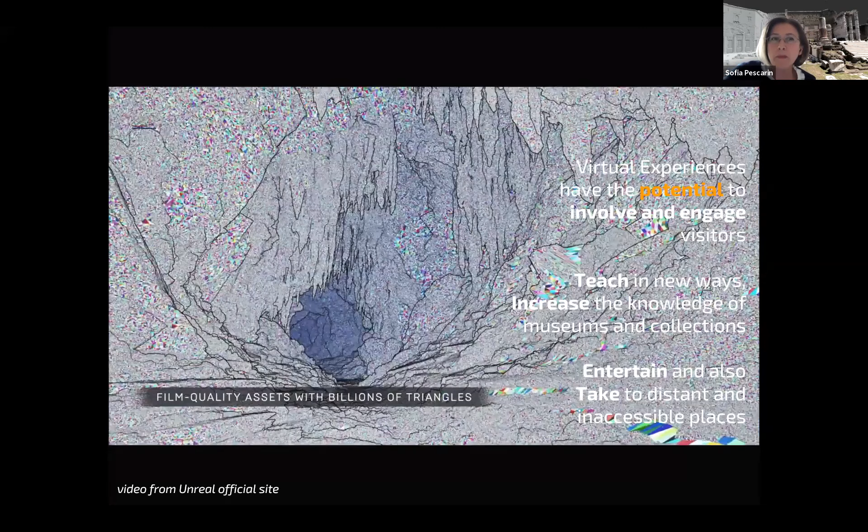But on the other side, we are here because we feel, we know, we understand the potential of the VR immersive environment. What you are seeing here is just a video from the official site of the new amazing engine, the 5th version, which is supporting full capability for a really high number of polygons in the near future, enabling us, in digital acquisition, to really keep the quality of our data.

We understand also the potential of VR in teaching and improving knowledge. There has been a lot of work in VR and learning, and also trying to increase understanding of museums and collections, a lot of work about virtual museums. And also with VR, potentially we can take visitors to distant and inaccessible places.

And this is what potentially could have happened also in this COVID period. So immersivity and interactivity are defined as the key elements, those that can create the sense of presence. But these technical aspects are not enough actually to fulfill visitor expectations.

So I wanted to start from real visitor expectations, when they decide to go to a place to start a journey in cultural tourism. And actually what we are seeing online is not a lot; it's not so close to our expectations. I'm talking about virtual visits. You can find 360-degree visits, in some cases with some audio, but also in the more interesting examples of computer graphics exploration online. Sometimes I feel that there's something missing.

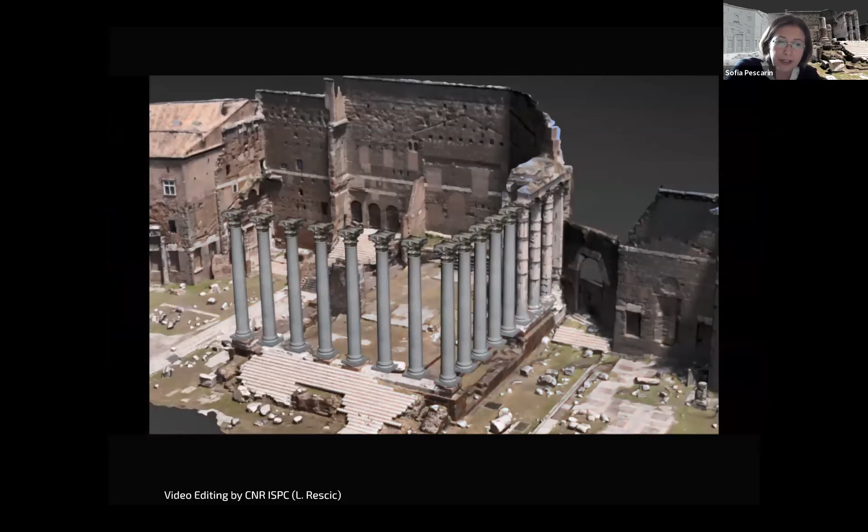We tried to adopt a co-design approach and work together. To develop the game, we started a reality-based acquisition campaign that led us to reconstruct, first of all, the 3D scenario of the site as it is today, and used it in combination with all available sources—historical, archaeological, iconographic—including the latest archaeological discoveries in this very central archaeological site in Rome.

From that, we reconstructed a new 3D scenario of this site as it potentially was in the 1st century, in the time of Emperor Augustus.

We then identified, together with museum experts, 35 learning concepts. Those learning concepts were also the information given to tourists visiting the site by the guides. Let me give an example: the Forum of Augustus was a space for justice, for trials. Trials took place in tribunals. The forum was not open to all citizens, and so on.

So, 35 concepts. And from these 35 elements, we developed a story—let me tell you the story of the game.

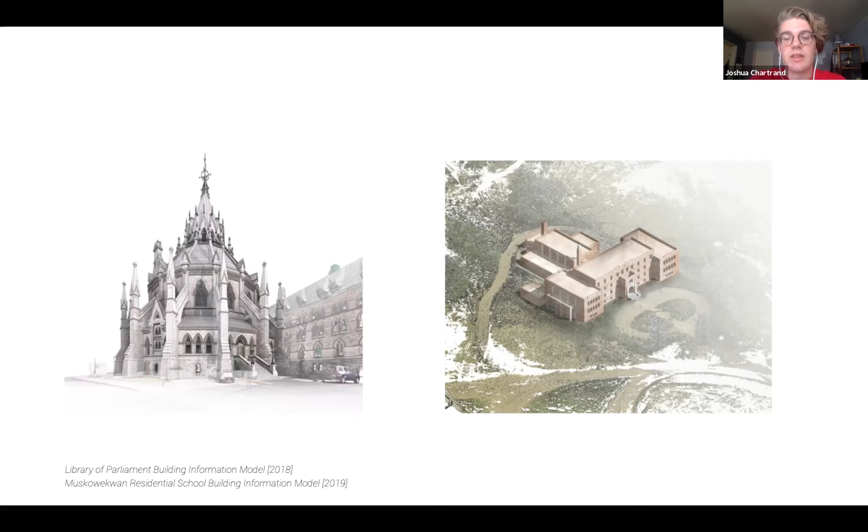And on the right there is the Muskowekwan residential school, which we actually worked with the National Trust last summer.

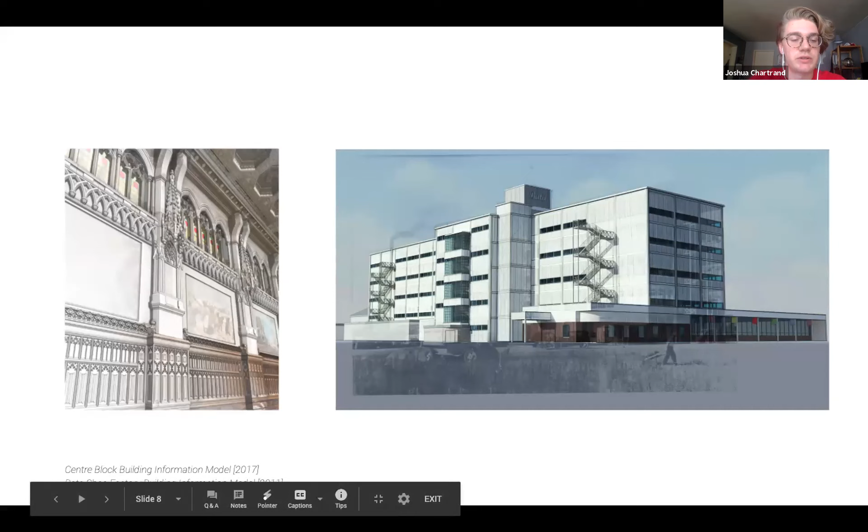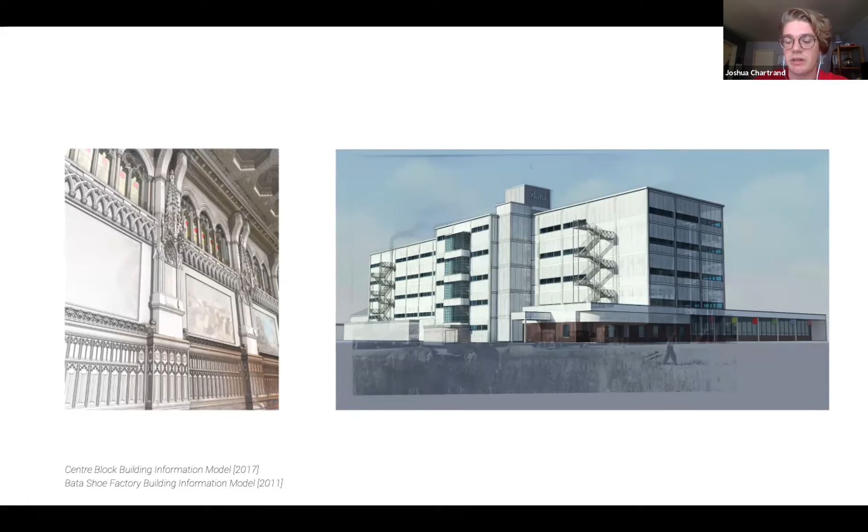Our work on HBIM goes all the way back to 2011 when we actually modeled the Bata Shoe Factory. It was one of our first BIM projects. We've also modeled the other Parliament buildings as well, there's 3 of them: Center Block, West Block, and East Block. We were really able to use these models in different ways in a few different projects I'm going to be talking about.

Over the last few years, we've been able to play around with VR a lot, and we were given the opportunity with the federal government to work on a couple different VR experiences using those Parliament buildings. Shown here is the VR Kiosk Project, which was set up for Canada's 150th back in 2017. For this project, we were able to tell the history of Parliament Hill through 5 individual 360 video experiences that were then loaded onto a headset, so the user could look all around them and experience it. This is one of the shots from one of those videos.

More recently, we worked on Parliament the Virtual Experience, which actually just came out a couple weeks ago. This is a little more active VR experience where the user is taken through 6 special spaces in the center block to, again, tell the story of Parliament Hill and the use of these different spaces and the overall structure of our government. This is a shot of some animations over top that model.

The Canadian Parliament center block is actually going to be closed 10 years for rehabilitation. So models that we made in past years have really come in handy to show Canadians what their Parliament was like, since they won't be able to visit it currently and for the next 10 plus years.

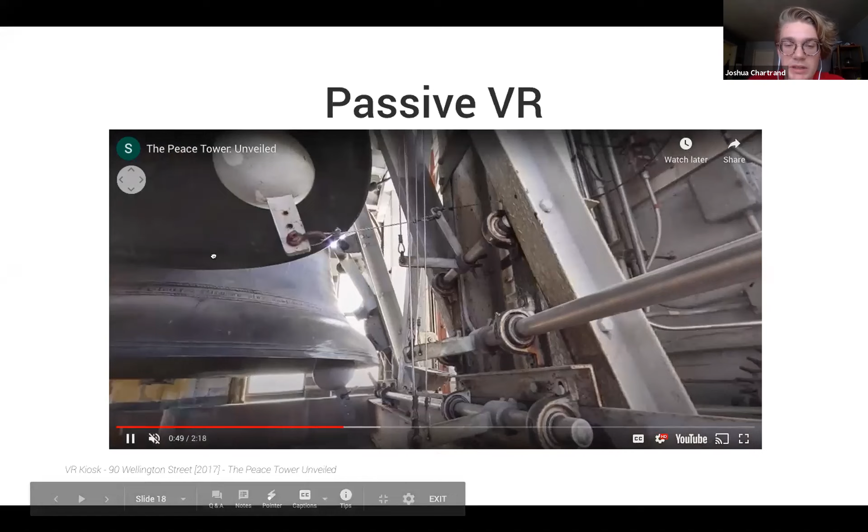This becomes really important in the sharing of heritage spaces and spaces that you can't normally see, especially now in the time of COVID. But even before that, like I had mentioned, these spaces are now closed off to the public here in Ottawa. So you're able to explore different parts of the building that you'd never get to see.

So that's passive VR, but we also have active virtual reality. This includes medium to high interactivity, scalable fully 3D environments, and the viewpoint depends on the position of the user because they can actually move around. They're not just looking around with their head, they can physically walk around, either actually moving around in their physical room or using some sort of teleport mechanic to go to another part of the virtual environment.

And these experiences play out based on the user's actions. So usually there's a set of interactive objects and user interfaces, more complex controller input, and then again, teleporting to make your way around the room.

So this here is an example of active VR. This is just a test using one of the models we have for Parliament. Here I'm actually moving around the room. Sorry, it's a little laggy there. And not just stuck in one place.

This technology is growing pretty fast. The Oculus Quest just came out last year, and this is a headset that isn't tethered to a computer. It's completely portable, but it still allows the user to physically walk around their room and interact with the virtual environment in that sense, rather than just being stuck in one position. When I first tried this, it's just so immersive because you don't have to click a button to move around the virtual room. You can literally walk around and you feel like you're in the virtual space.

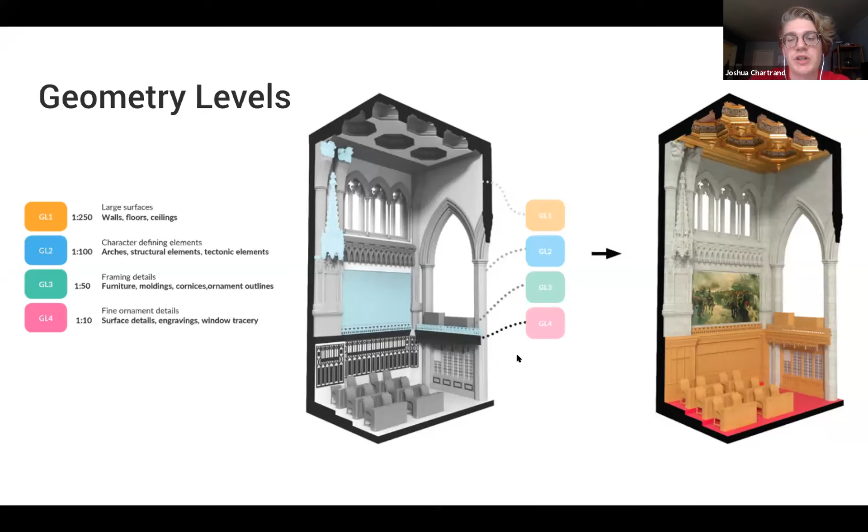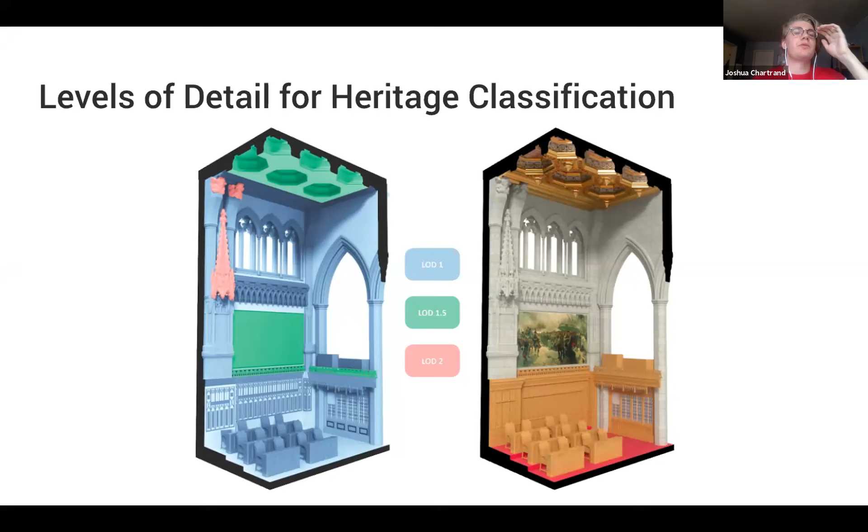And this here is our mesh workflow. It took a lot of trial and error to figure out how we could get these Revit elements into Unity, which is the game engine of choice. We hopped through a bunch of different software to do that, starting with some automation in Revit to take out the exact elements of each room that we wanted, cleaning that up in Rhino, and then applying proper textures in 3ds Max.

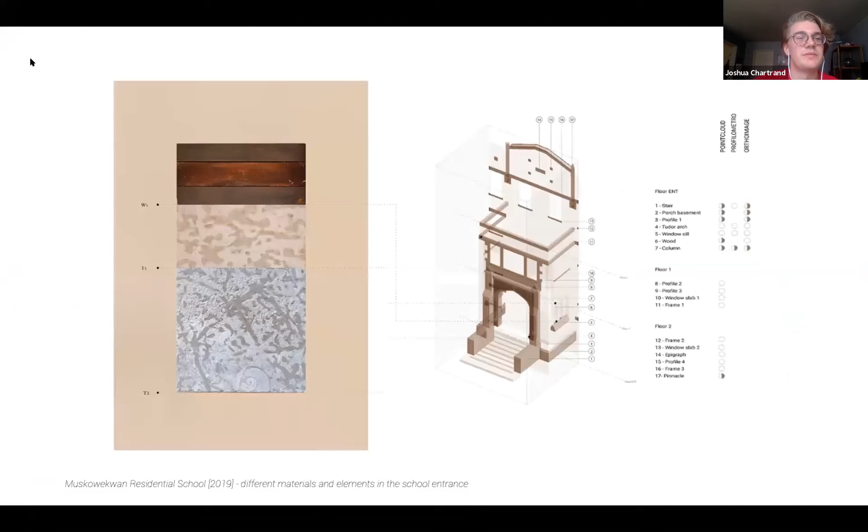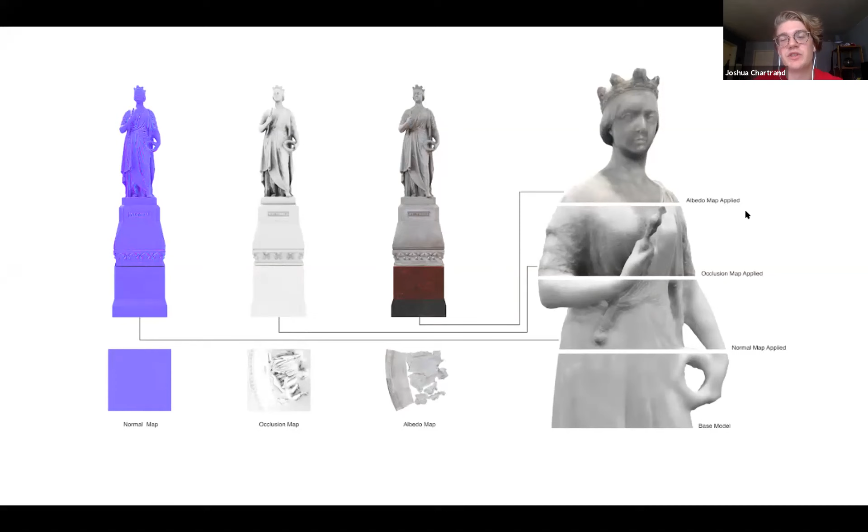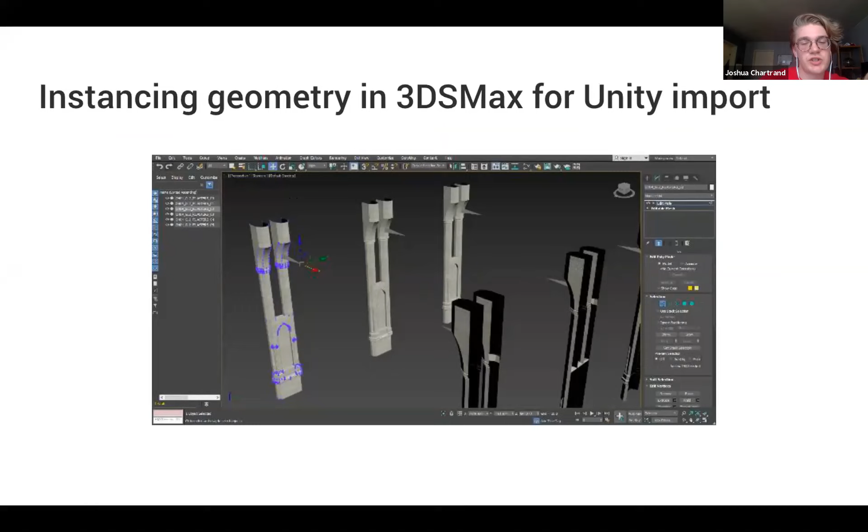Another technique we used was instancing geometry. Basically, we were able to tell the game engine that this piece of geometry is repeated a bunch of times in the room. So instead of the computer having to calculate it multiple times, it just knows—let's say if there are 100 chairs—that this chair is just repeated a bunch of times and it can process it that way.

So the Library of Parliament model before had about 45 million polygons. That's a lot for a VR experience—you really want to keep it around 1 million. After using all these techniques, we were really able to reduce the room, and it ended up looking something like this.

I'd like to invite everyone to check this out on YouTube. If you just Google Parliament the Virtual Experience, you should see it on the Parliament of Canada website. It's pretty cool how these spaces turned out with all the interactive elements that DPT added to them. Thank you for listening, and that wraps up my presentation.

Great, Josh, thank you so much for your presentation. Hearing the construction noise in the background makes me feel a little bit better about where I'm doing this from, and I know where a lot of us are working from right now. Thanks for persevering through those conditions. Yes, I apologize. No, you're good, it's very real, it's what we're all going through right now. Thanks for persevering and giving a great presentation anyways.

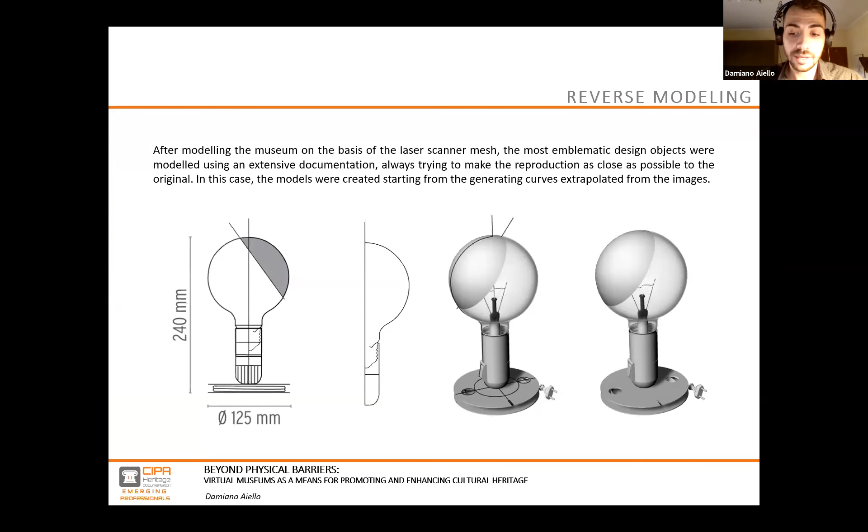The design objects, instead, were modeled using 2D drawings by Castiglioni. All the digital assets were then imported into Unreal Engine, where the simulation was developed.

The main goal of this experience was to allow users to virtually visit all the rooms of the museum and to access all the design objects. So we set up a teleporting system that allowed the user to access all the rooms of the museum just by pointing the controller in the desired area, using the blueprint system as I showed you before.

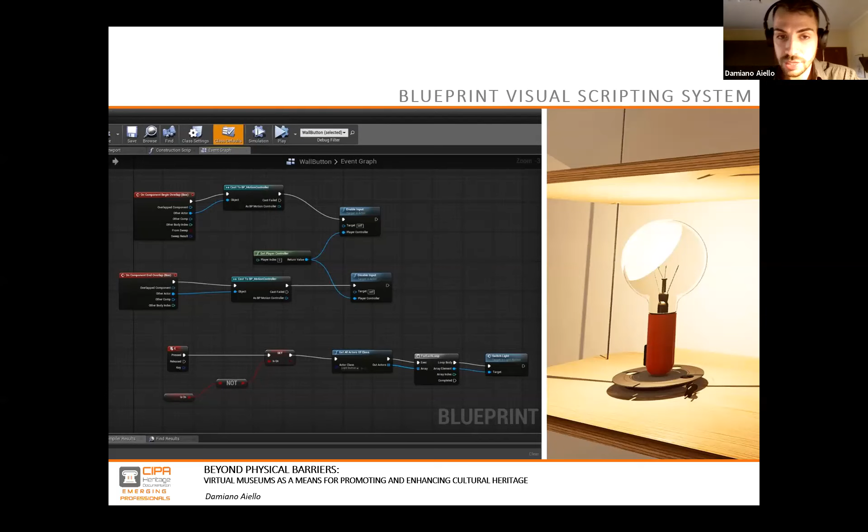Now I'm going to show you some screens of the experience that you can see in these slides. But soon I will show you a trailer of the experience to make you understand better how to move in the virtual environment.

The virtual simulation is still under development. At the moment, we are working on the playful component. In particular, we're thinking to transform the simulation, which is for now just a virtual visit, into a serious game, during which the user will be called to overcome some challenges to unlock some areas of the museum and to access all the rooms. Once the last challenge is overcome, the user will receive a prize that will help them understand the design process behind every object and better understand the genius of Castiglioni.

Now I'm going to show you a video of the user experience, where you can see a user exploring the museum rooms. One of the most interesting elements you can find, as you can see from the video, is the Brionvega radio that you can interact with to listen to 5 of the songs dear to Castiglioni. You just have to press the buttons of the radio with your virtual hand, and you can stop and play music that maybe you can hear in the background of the video.

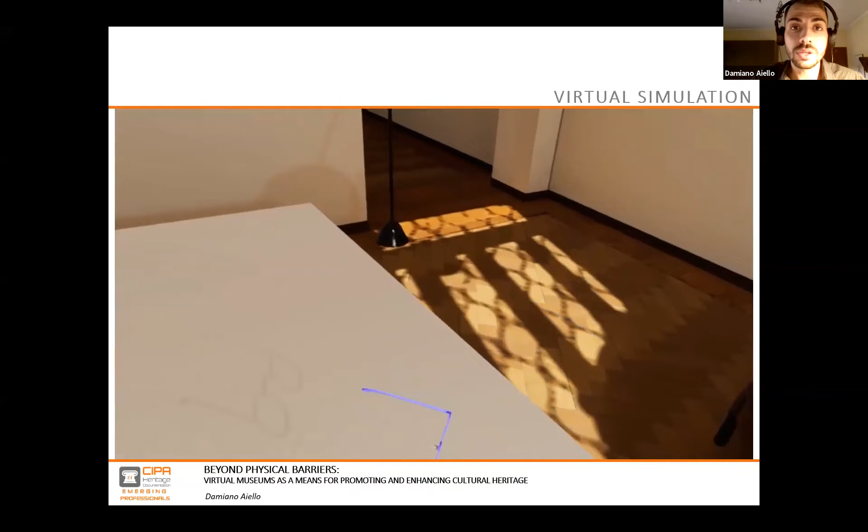The experience was enriched with details that allow you to get directly into contact with Castiglioni's personality. For example, you can grab the drawings by Castiglioni, or grab his famous blue round glasses. We added these elements because we wanted the user to feel the presence of Castiglioni even in the virtual environment. Another interesting interaction is the movable TV that you can interact with to watch a documentary about Castiglioni's life, so you can know him and his design process better.

In conclusion, these two projects analyze two different types of virtual museum. One is based on the communication of cultural heritage in a fictitious environment. The other is based on the documentation of an existing museum. In both cases, virtual reality has proven to be not only a very powerful tool to tell stories and engage us emotionally, but also a very effective means to allow us to get in touch with others and access cultural heritage from all over the world.

And this is an extraordinary power, above all if you think of those people who cannot travel because of health reasons or economic reasons, or because of exceptional events such as the one we are currently experiencing. It is important to notice that this virtual simulation never replaces the real visit, but has the extraordinary power to help us overcome any physical, temporal, or even cultural barrier.

So we can imagine VR, to use the words of Chris Milk, as an empathy machine that makes us feel close to each other and that can help us access places far away from us. Especially in this period during which we have been experiencing the meaning of loneliness and detachment, we can understand how important this sharing is. Thank you for your attention.

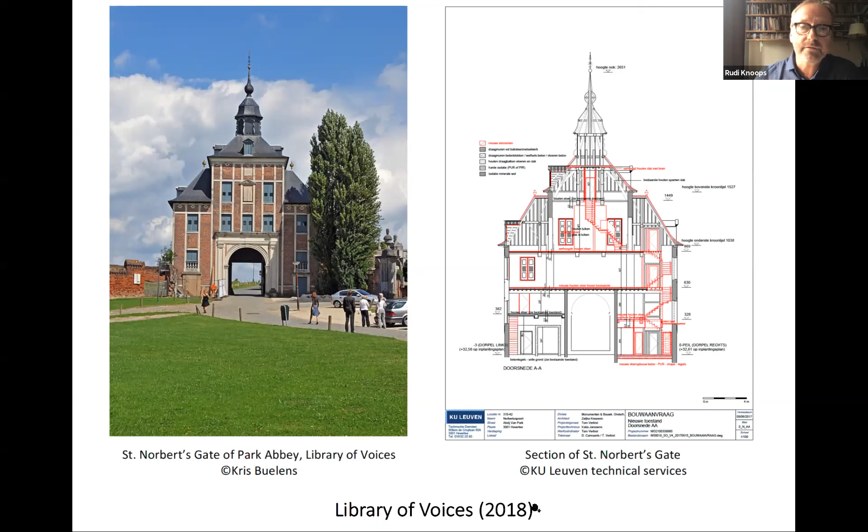Since September 2018, we have a new seat, a second seat in Park Abbey in Heverlee, which we call the Library of Voices. It's another gate building, and this is another research tool that we have now. It's a library, it's a physical library, but it's also a sound laboratory. In fact, it's two sound labs that have a different function, which I'll explain now.

On the first level of the building, where also the physical library is housed, we have what we call the Alamire Analytic Lab. This lab is geared towards the analysis of the complex musical texture of polyphonic music. Polyphonic music is layered music, it's multi-voice, it's very complex. And with this lab, we try to develop an instrument that makes it possible for musicologists and other people that study this music and are interested in it to analyze this music in a different way than was before possible.

Technically, this lab consists of a high resolution screen, a 20 speaker array mounted in a horizontal plane just underneath the ceiling, a number of amplifiers to power the speakers, and a TiMax auralization processor. The complete setup of this analytic lab enables us to auralize up to 64 different sound objects, or different sound channels or voices, in the physical space of the lab. So this is already a kind of mixed reality application.

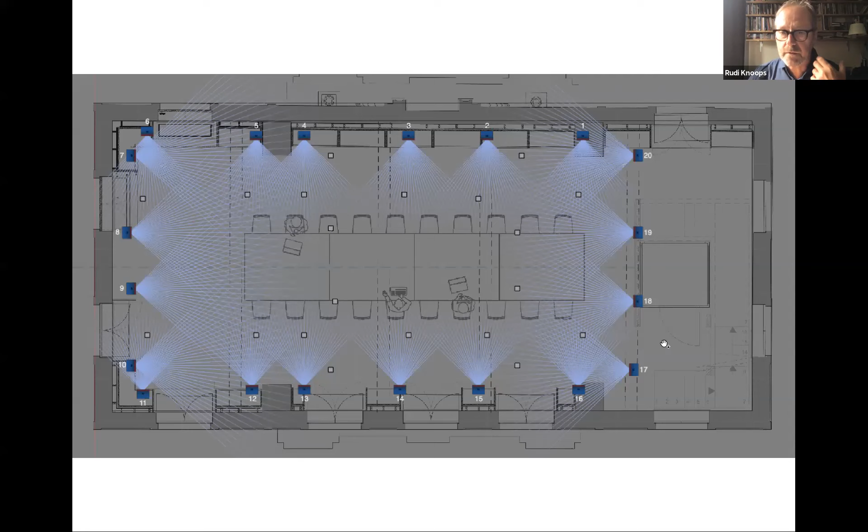There's one drawback: if this is just a linear video that's being played out, the analytic value is limited, because the analytic value lies in taking a position or approaching one of the sound sources positioned in the lab. So we went one step further and used these materials in an interactive way. I used MaxMSP to build an interface so that you can consider each one of the performers as a button that you can enable or disable. Just clicking on one of the performers enables or disables the sound. In this way, this becomes a very intuitive and very strong way to explore the complex musical texture of polyphonic music in a way that was not possible before.